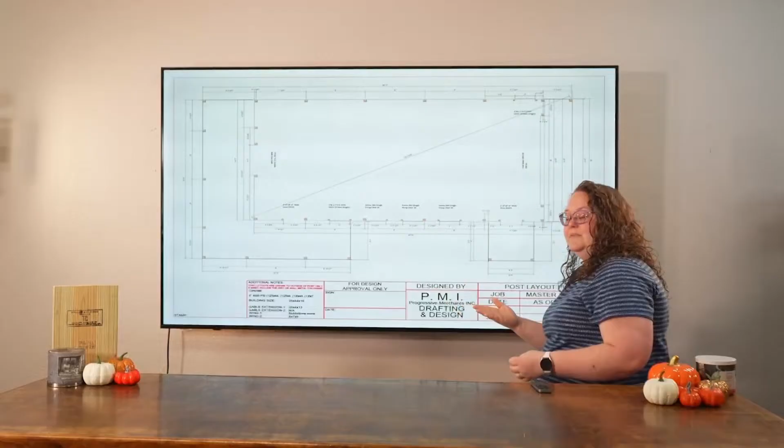The girts are going to be the last few things that are going up; the posts are going in first. So that's why they need to know where the posts go and not where the girts go, because they come in after. And that'll help you if things in the corner are like, well, I wanted it 3 foot. It doesn't say 3 foot, it says 2 foot 10.5. Well, that's where the 1.5 comes from. There's plenty of other things we can go over on here.

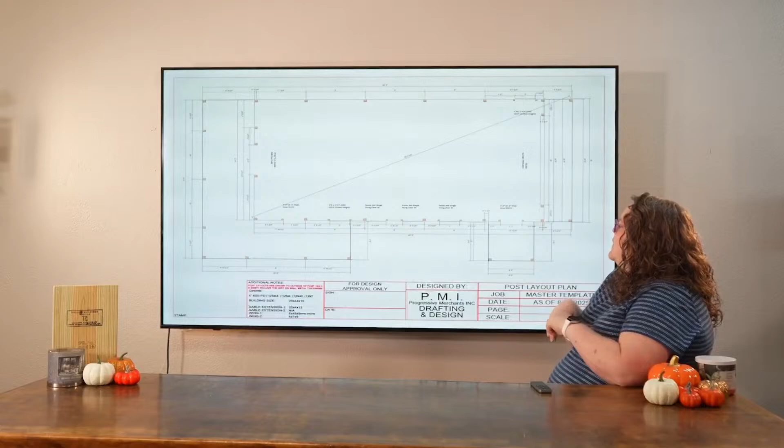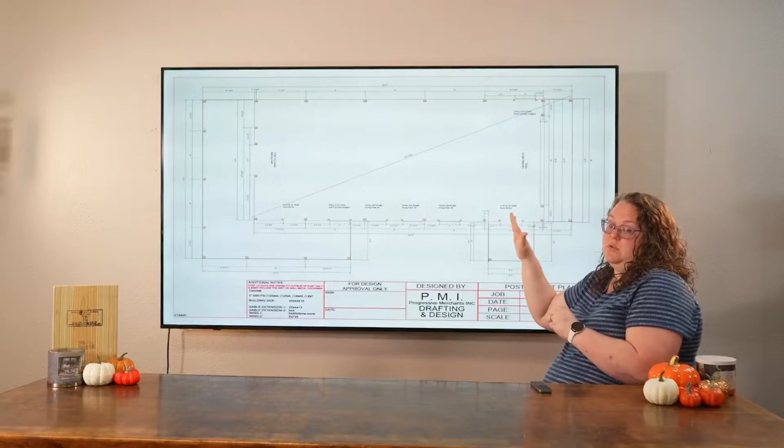You got your windows noted and your doors noted and your roll-up doors noted on here. You want to be looking to make sure that what you bought, and you should have a copy of your contract checklist, matches the number and quantity and sizes of the openings on here. Sometimes things get lost in translation, and that's okay, we can fix it. But you don't sign until you make sure that this is correct, because the builders build off of this.

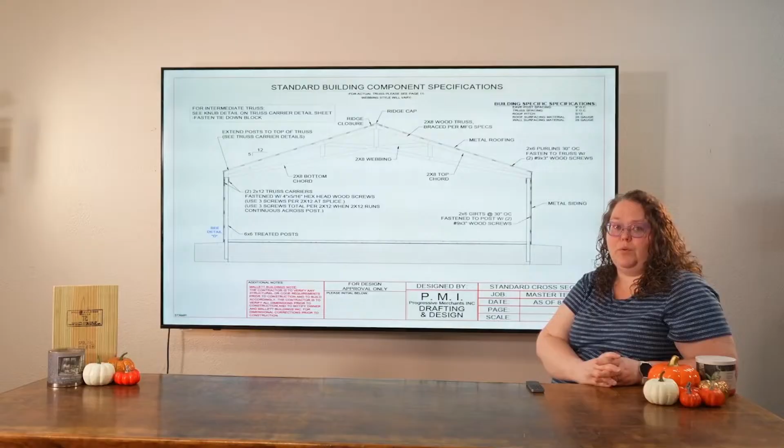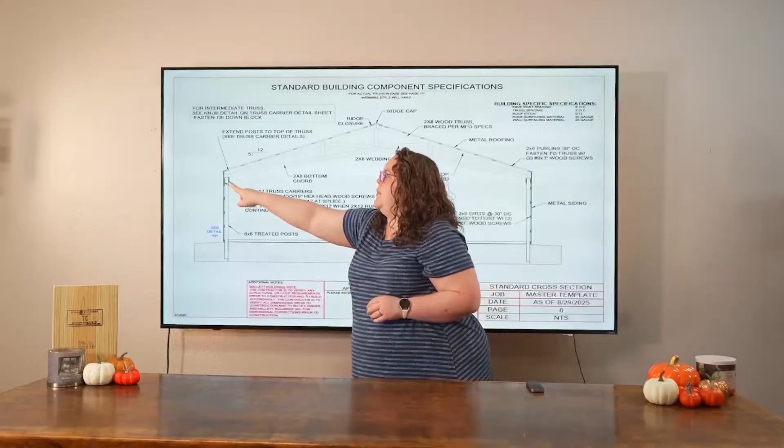This right here is a lot of information for new people, but this is something that's required for your permit office. They get to see what your building is entailing and what we're doing. Like I have 6x6 posts, 2x12 truss carriers. My post does not stop anywhere in here. My post goes and extends to the top and gets cut off after it is set.

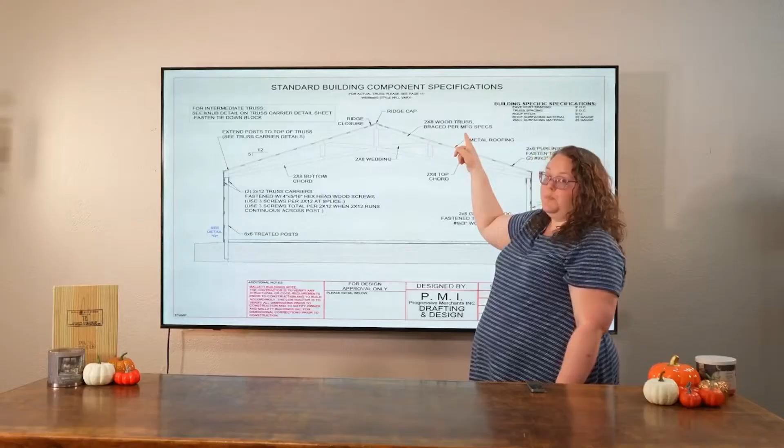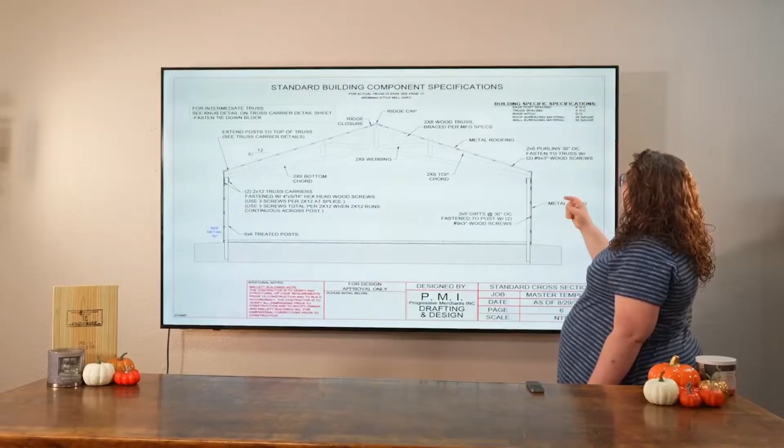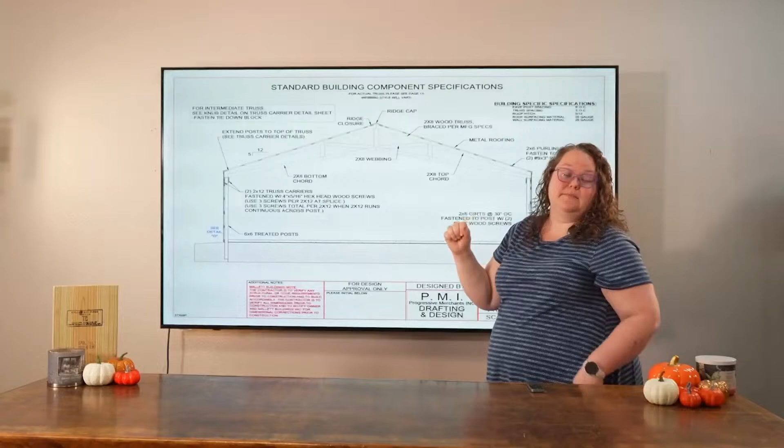We have webbing that is 2x8. We have a bottom chord that is 2x8. We have the truss itself is a 2x8 brace per manufacturer specs, which we'll get to later. And then you have the 2x8 top chord, roof metal, the purlins, the siding, and then over here I have that specific information about your building. That is taken directly from page 3, okay? And that sums up that page.

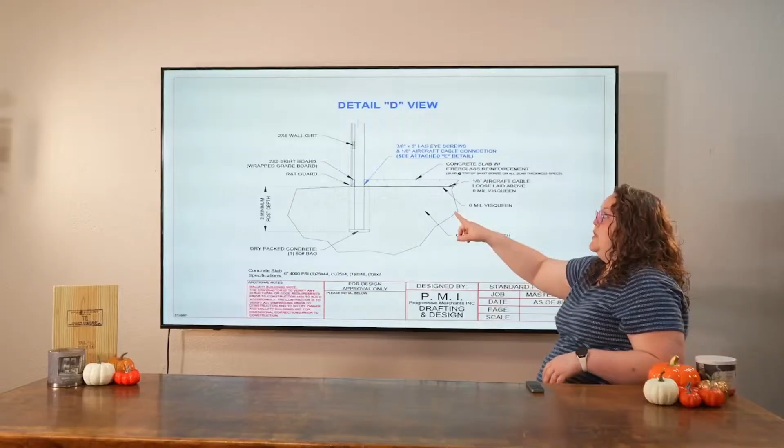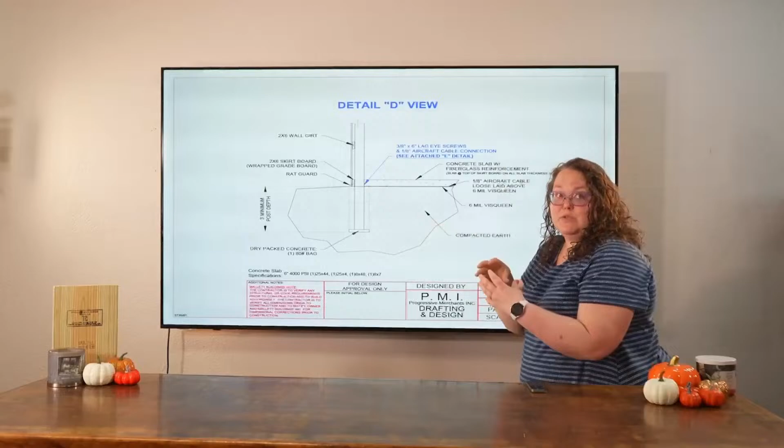Again, if you know what you're looking at here, you can check it. But if you don't, it's okay. It's for your permit office, and your permit office should know what they're looking at. Same thing goes for this. We had a footing down there that was labeled and marked. I just have a circle where the other circle was in the other drawing. And I'm telling you, these are the things you couldn't see because it was too small, and now it's bigger, and now you can see it.

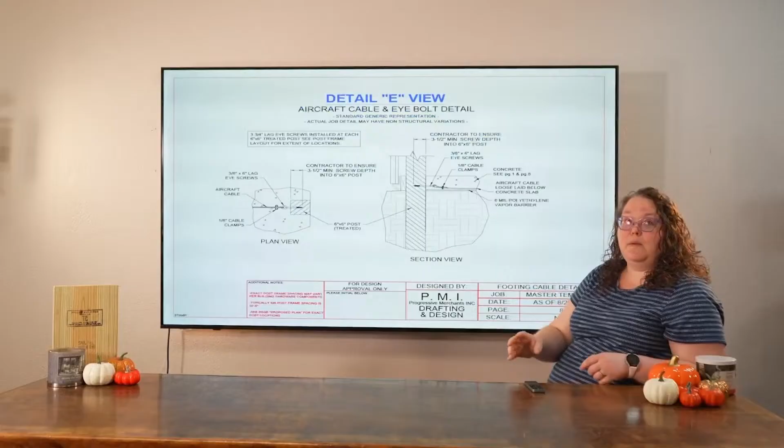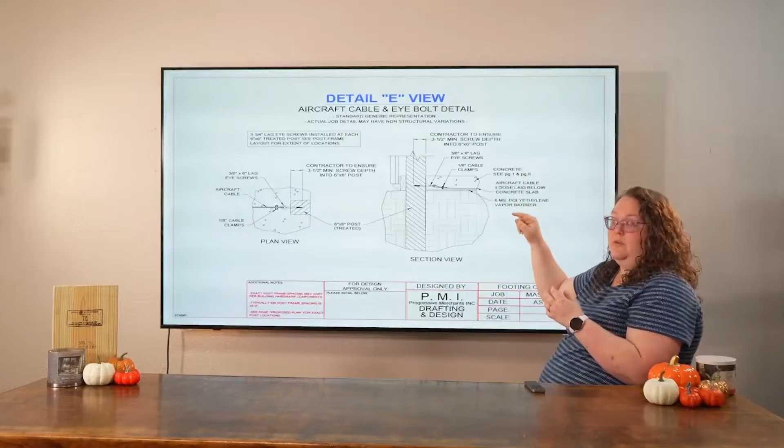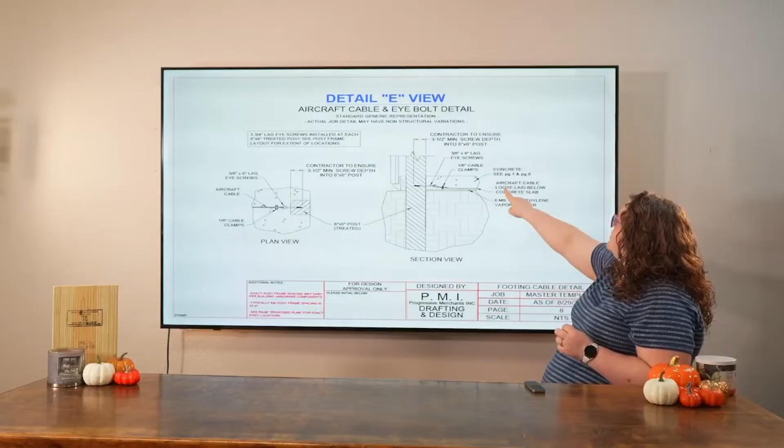And then we have noted another detail. Again, this is for your permit office. I'm explaining what wasn't viewable in the other drawing here. Because it's bigger, it's more blown up, I can show you more information. And I mean, it's kind of self-explanatory. It says the aircraft cable and eye bolt detail for this one. So you can see the eye bolt, you can see the cable and how it's embedded in the concrete. And I tell you that it is loose laid. That's the biggest thing that you get from that one.

And this is a basic layout if you have a rectangular building with no wings and no gable extensions. This is on every single page packet that we send out. I've only had a couple scenarios where they needed something building specific, but 90% of the people that we send these out to, it works. It's fine, you get the gist. And then this is the manufacturer details of the truss that is going to be built and sent out to your building. This particular building is a garage. It's a very nice garage, in fact.

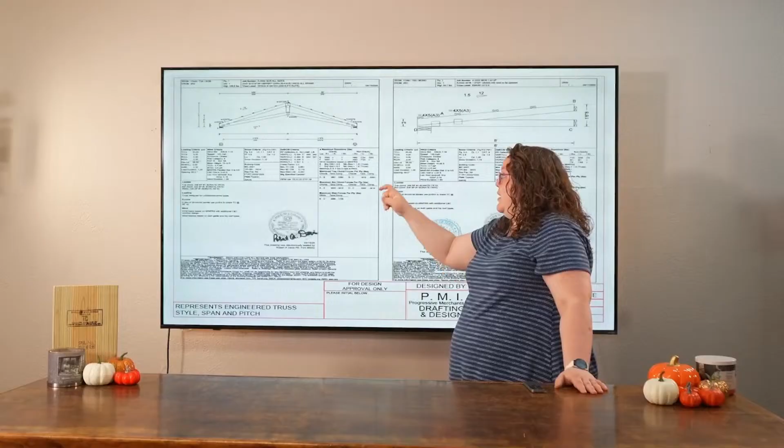But I don't have any little things on here that say the manufacturer requires bracing. And I don't have anything here that says, hey, you need bracing. So these two particular trusses don't require bracing because we have the purlins that brace the building. That is enough. That is all they need. Now, if the manufacturer required them, they would put them. But Mallett likes to put bracing starting at a 20-foot truss, which is what we have here. And so you'll get at least one or two.

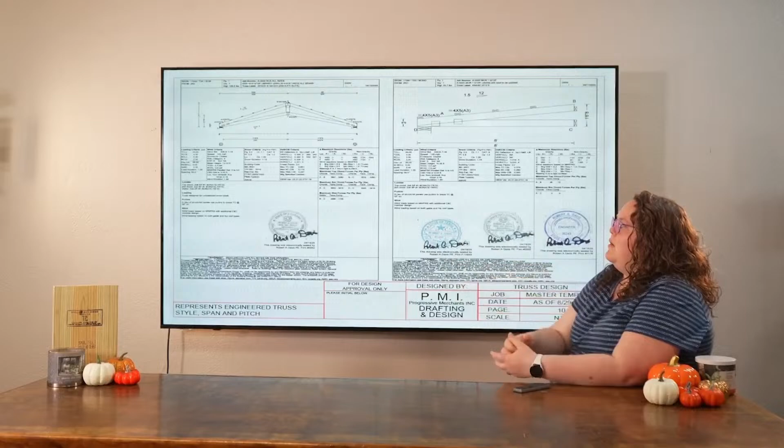And that pretty much sums up everything for the drawings. These come directly from my manufacturer, and they do stamp it. And we just include it for you guys for your permit. And that pretty much sums everything up.